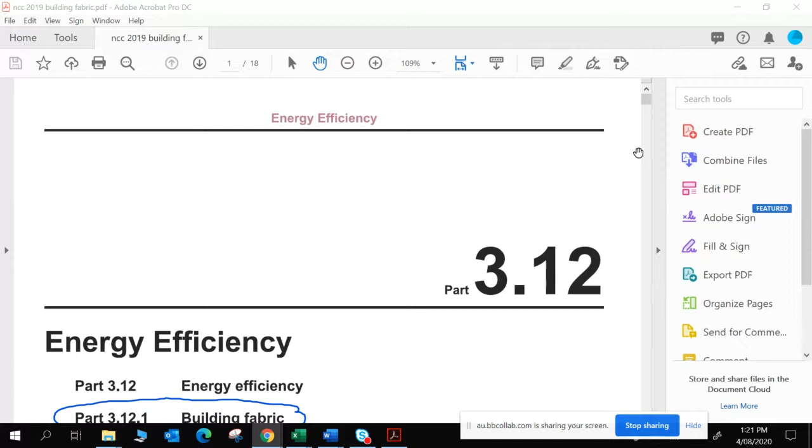So I'll be showing you the new 2019, despite the fact that there are no real substantive differences when it comes to your interpretation and your tasks, and certainly the application in regards to Class 1 and 10 buildings. I've put this updated 2019 PDF on the Learn page for you to refer directly to the section that's applicable. But by all means, and in fact it's even expected of you at this point, you've created an ABCB login, so the Australian Building Codes Board.

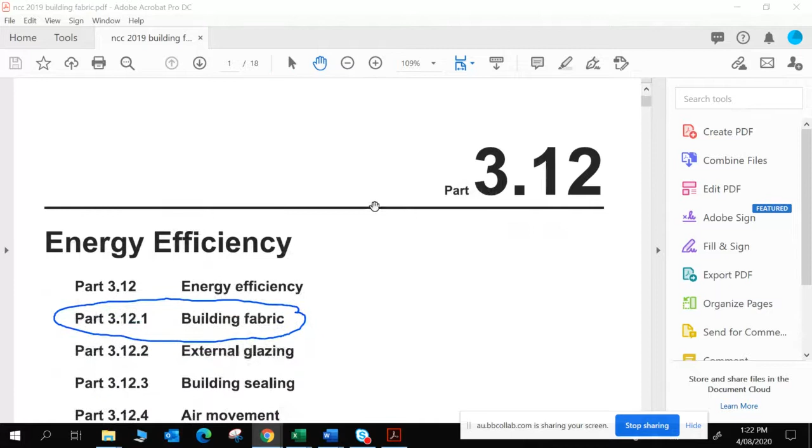Create your own login, and I encourage you to download a copy of the 2019, at least Volume 1 and Volume 2 NCC. Our Volume 3 is not particularly applicable to building designers. Some aspects in there from time to time are, but in the main, Volume 1 and Volume 2 are the really important ones for you to download, because you need to have regular access to them. Being a residential building, I'm referring to the Volume 2 section, and this one's here for you, supplied as a resource.

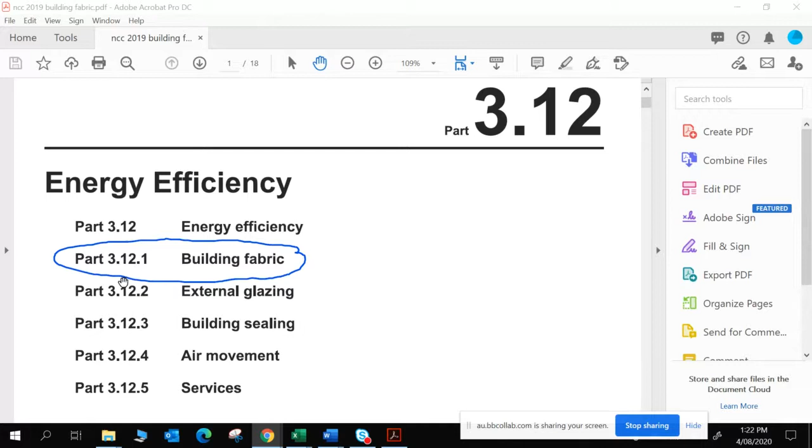We'll be looking at, for this second stage, the building fabric. When it comes to energy efficiency, we've got things such as our building fabric, which play a role in how energy efficient a building is, our external glazing, our building sealing, air movement, and services. Later on in the subject, we'll be looking at more of these other aspects, but currently we're having a look at building fabric. So we'll go to Part 3.12.1, but on the way, I've marked other little bits and pieces that we should consider.

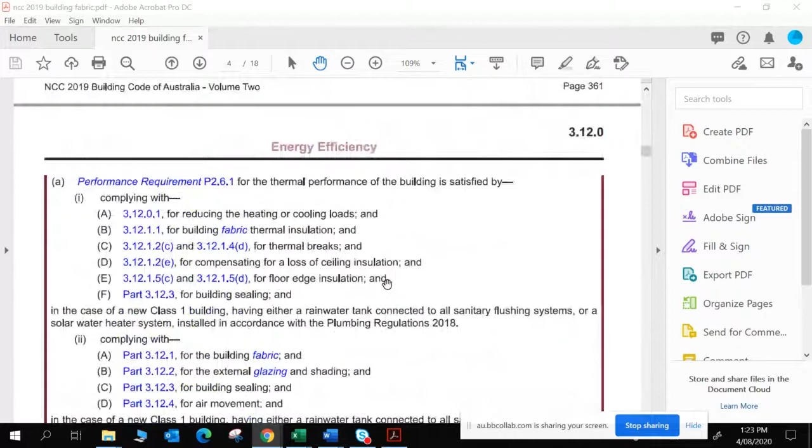Scrolling down through here, you'll see the section of markup. It's where we've got a bit of explanatory information saying if you want to comply with the NCC, you've got two options. Well, this is the deemed to satisfy approach. Now there's always the possibility to meet performance requirements. However, the justification of those performance requirements is a difficult, lengthy, and often expensive process, and something that goes beyond the bounds of what we can adequately cover. And each situation is unique as well.

So we don't focus on that in this subject, but we do look at deemed to satisfy, and in meeting the deemed to satisfy, we've got two options. Our option one is to get an energy rating.

So if we have sufficient knowledge and insight into how we can make a reasonably energy efficient building, we can typically apply that knowledge straight away in our design and be fairly confident that our energy rating will meet 6 stars, and then we go out and get an energy rating that meets the 6 stars, and we progress on.

So that's one option, is we can have an energy rating. They're fairly inexpensive and also provide a great deal of insight into other aspects that you might want to tweak a little bit as well. So certainly a good idea, but to help with some of the base understanding, some of that formulation of how we design an efficient building, it's really good for us to go through the approach of the elemental provisions.

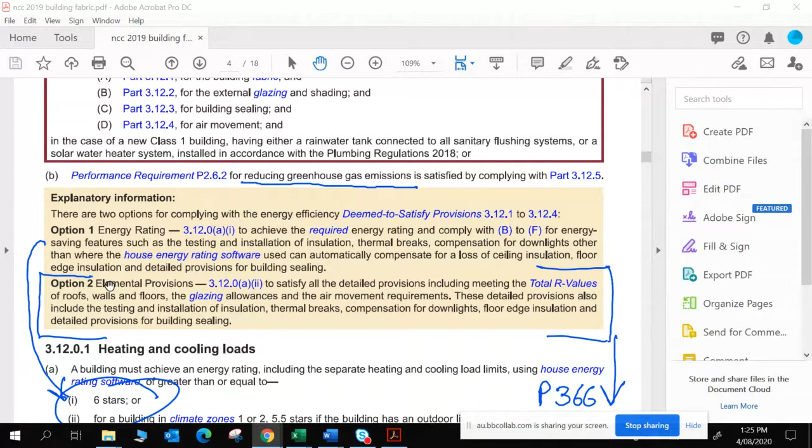So that's what we'll be doing primarily in this session, is having a look at the elemental provisions, because that tells us typically in this stage the level of insulation we'll need in certain scenarios for certain types of building fabric. So our elemental provisions are on page 366. So we'll make our way down to page 366.

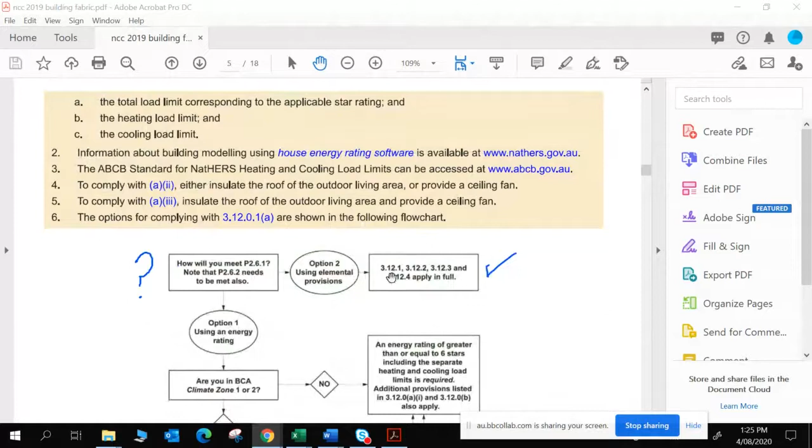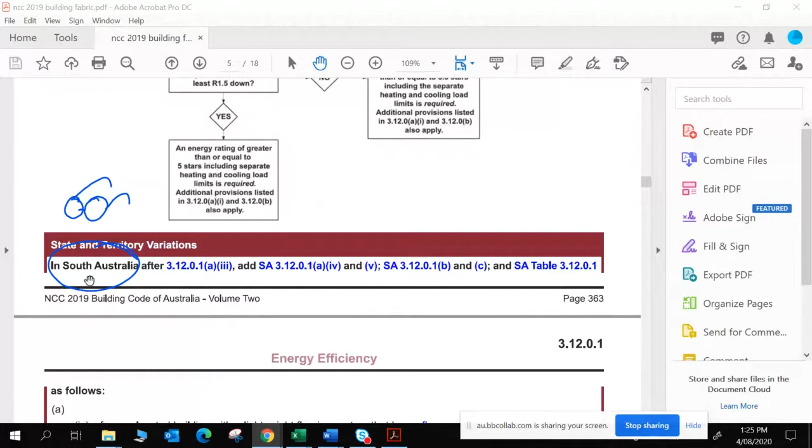On the way, here's a diagrammatic version of basically what I've just expressed up here. You can have a look at that diagrammatic version if that helps with that understanding. So on the way, something that's not applicable to the task or specific to what we're covering in this subject, but something you should always be aware of within the NCC, is that there are state and territory variations. And whenever you see a state and territory variation, it's good to stop and read and have a look. It may apply to you.

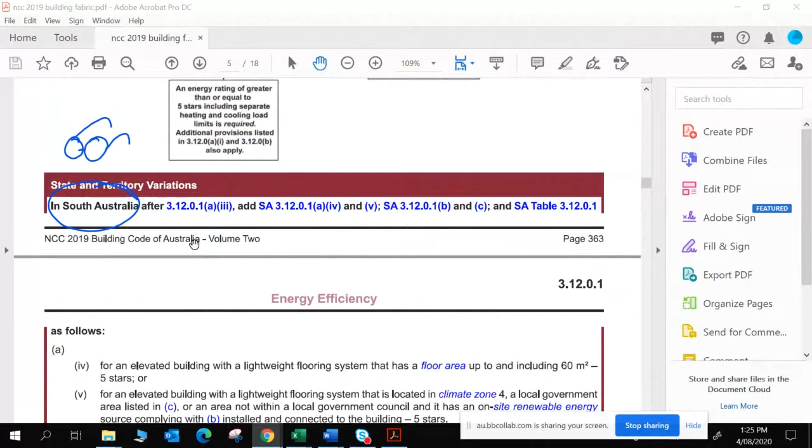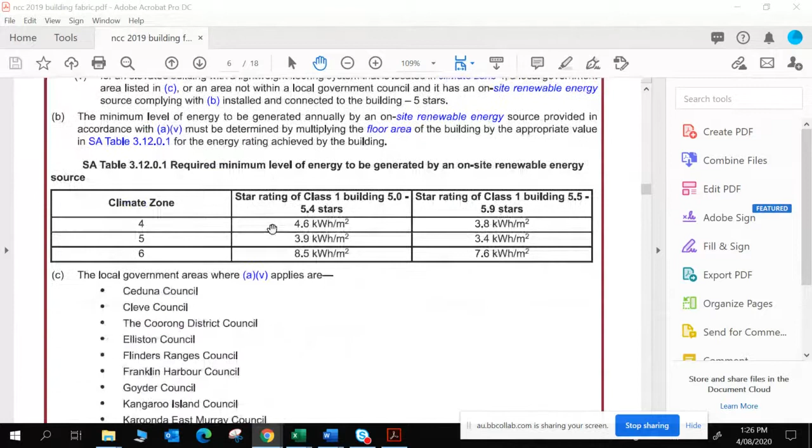Now, this particular state and territory variation for South Australia, so the area in which we're working, is about providing some concessions for lightweight buildings in certain areas within South Australia. So you'll see that under here, there are local government areas listed. So primarily our northern and remote council areas. So we've got Ceduna, Cleve, Coorong, etc. from this range.

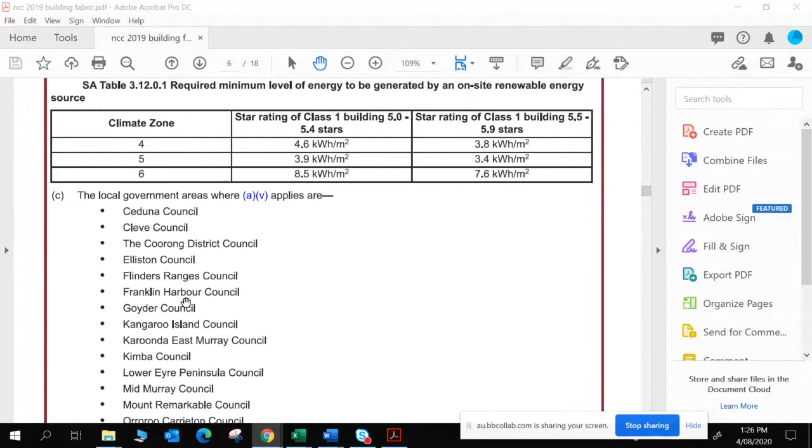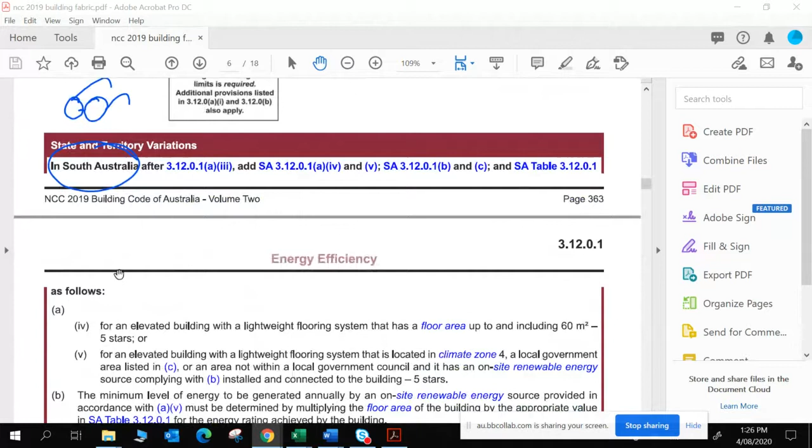So typically our council areas that are further out and not council areas that many of you will be working in, but some of you may, or from time to time, dabble in these areas. If you are and you're building a lightweight building, it may apply to you. You may be able to adopt this approach at a concession, which enables the energy rating to be reduced to 5 stars instead of our 6 stars as we saw before.

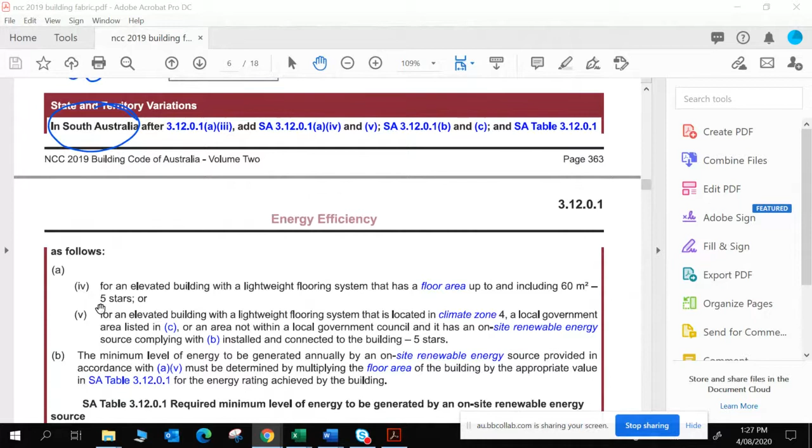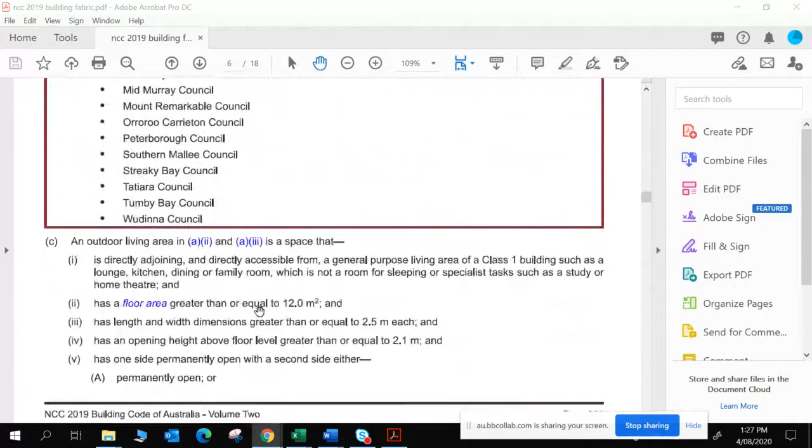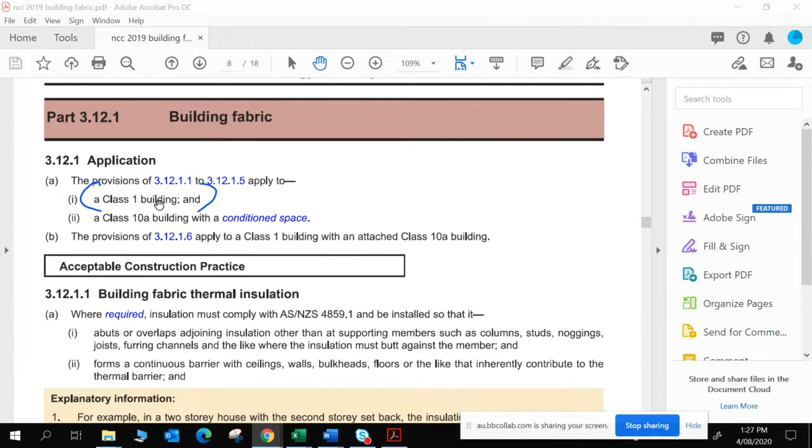But beyond that, look, have a read, have a little bit of an understanding of this, but most importantly, just be aware that it's there. So we'll keep passing on to what is directly applicable to what we're covering in this section here. So we're looking at building fabric, and we're looking at class 1 buildings, so our separate residential buildings, be that detached or semi-detached buildings. Then here we are at page 366.

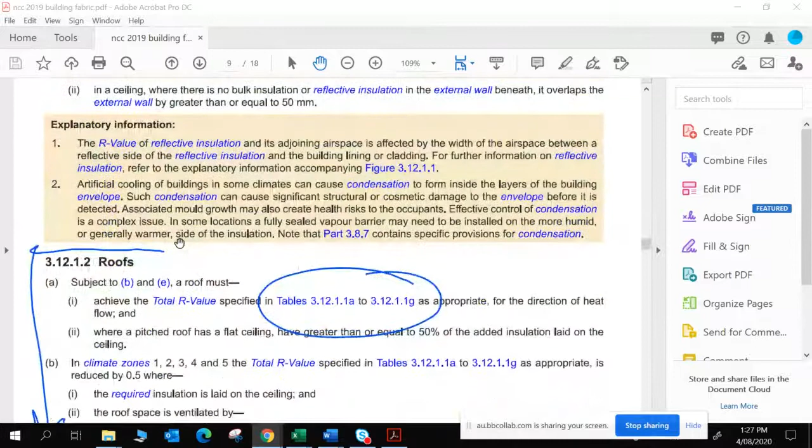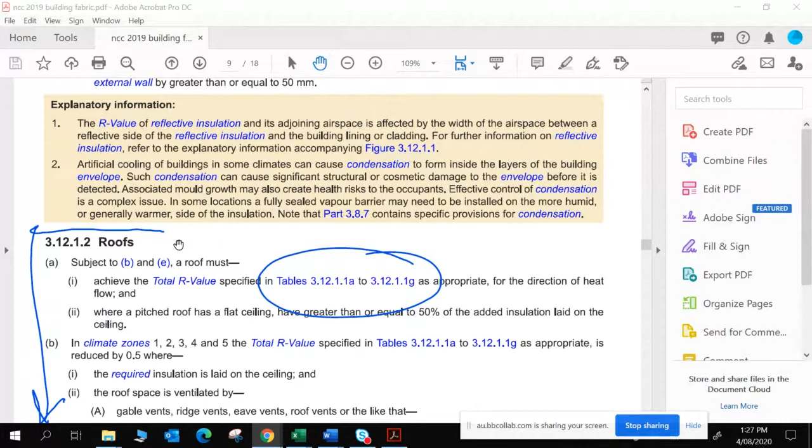This is where it all really starts with our building fabric, and it starts with roofs. So this section is broken down into our components being our roofs, walls, and floors, and then we move on to glazing. But our roofs, they have to meet a certain R value, so a resistance value for your insulation. And all of that, the ins and outs of that, are explained in the lecture carried out by Michael White, that I think is there on the Learn page.

And I suggest that it's good to cover that lecture first. So watch that lecture and that tutorial session to digest all that information before you have a look at this updated video I'm producing here, because this video is meant to be supplementary to that resource and take you through the new 2019 version.

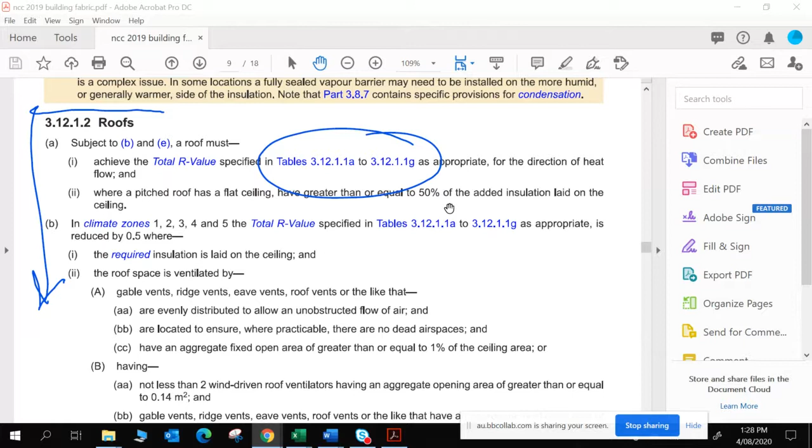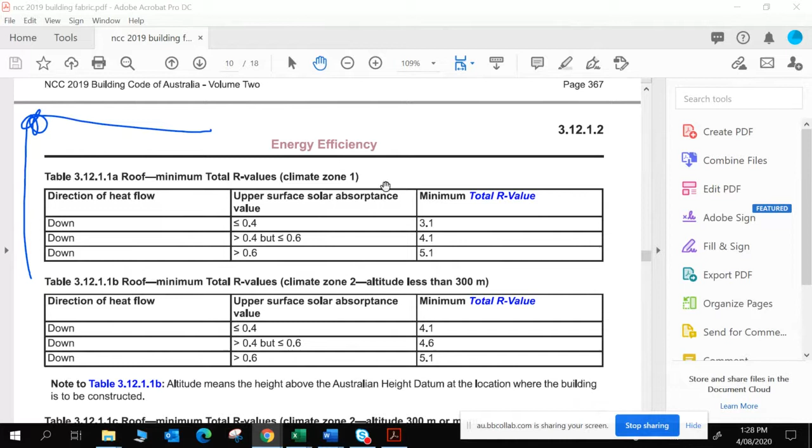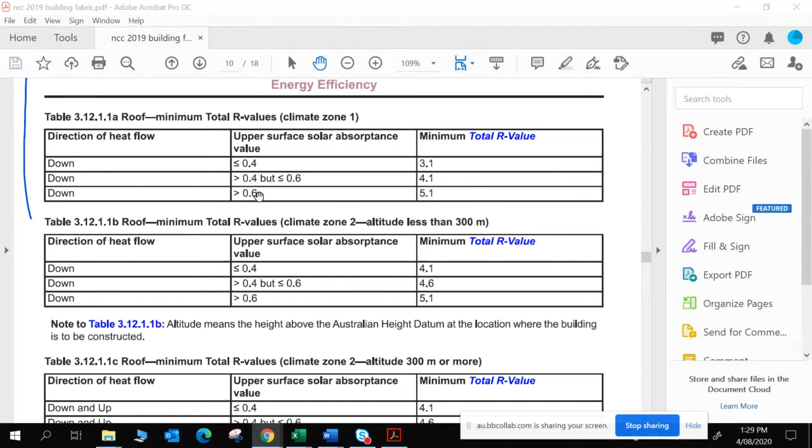So here we are at our roofs, and just like as is shown in that lecture there, we have minimum R values that are required for various different situations, be that our different climate zones or different roof solar absorptance. So that solar absorptance, as you should know, is based on the color of the roof, and different colors have a different degree of absorbance of that solar radiation, so have a different heating and or cooling effect on the building.

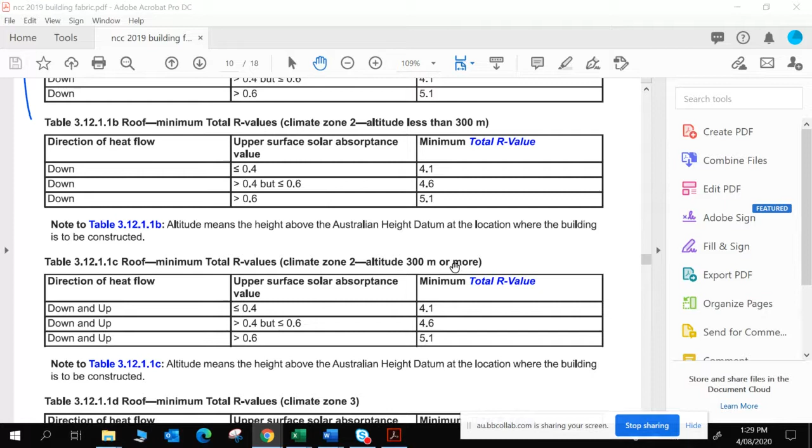So we have our different total R values required for different categories of solar absorptance under our different climate zones. And you see that climate zone 2 is broken into altitudes of less than 300 meters and altitudes of more than 300 meters, because as you increase your altitude, the average temperature drops away. That's why we have snow-capped mountains, etc. So as you make your way up the mountains, things get colder and colder. So we have different criteria for altitudes less than 300 and altitudes more than 300.

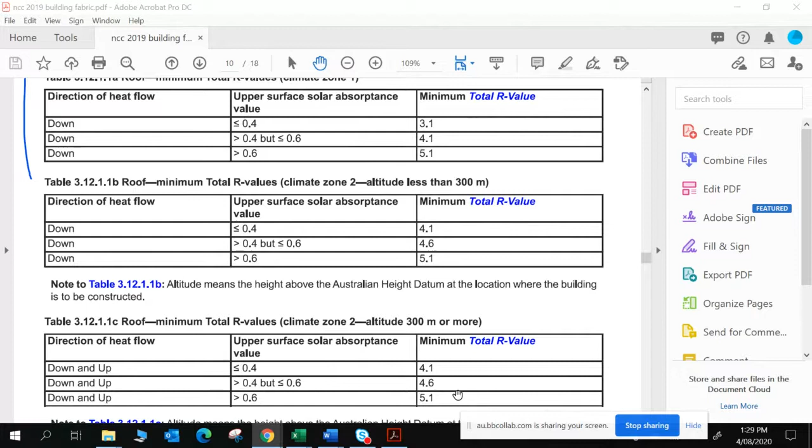But although substantively our minimum total R values are very similar, the major difference is that less than 300 is all about heat flow down, and then above 300 it's about down and up. And that leads into the next important thing that may help with task 2: in some situations we are concerned with heat flow down, and so insulate against heat flow down. But in other situations we are concerned with heat flow up.

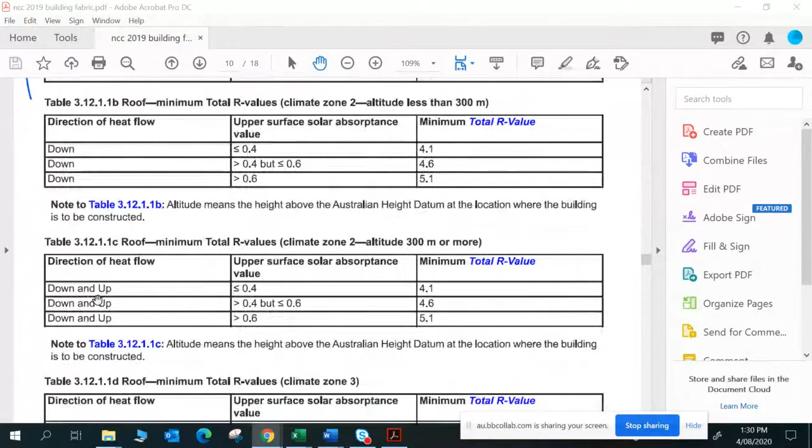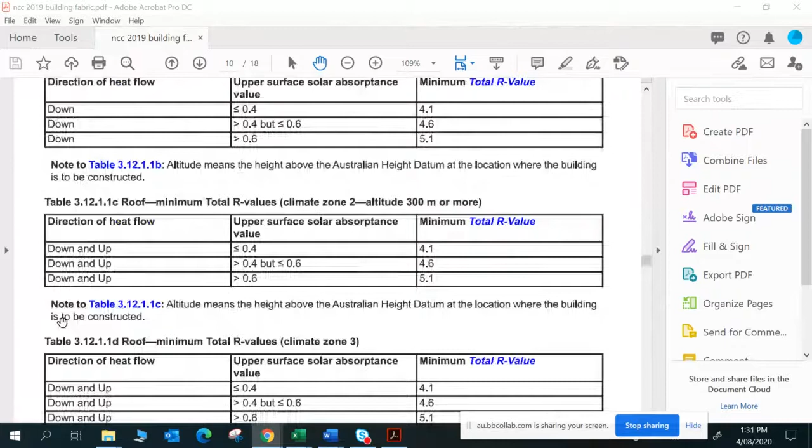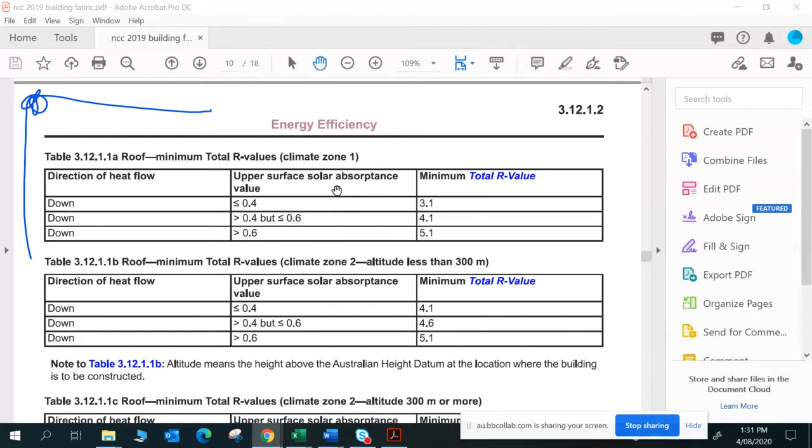So in our colder climates, climates 6 and 7, the ones with the higher numbers, we're worried about heat escaping the building. We want to keep those buildings warm, and that's where the focus of the NCC and the minimum R values required are on heat flow up. But in our hotter climates, climate zone 1, where the numbers are low, we're worried about heat flow downwards, the heating of the building from the roof space from the sun above. And in certain situations, we're worried about flow down and up.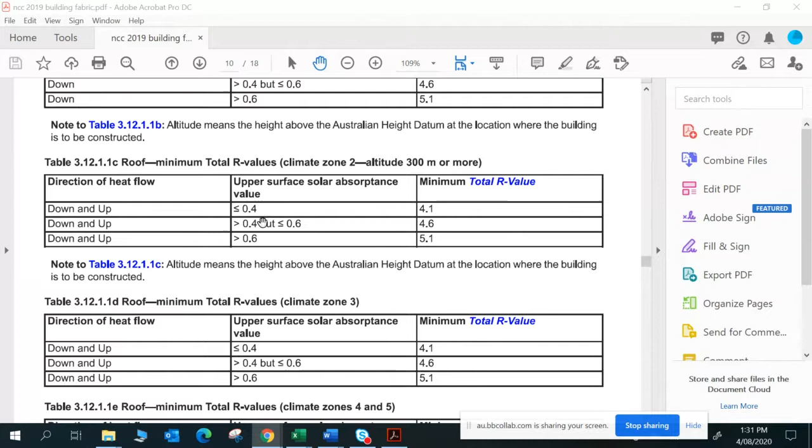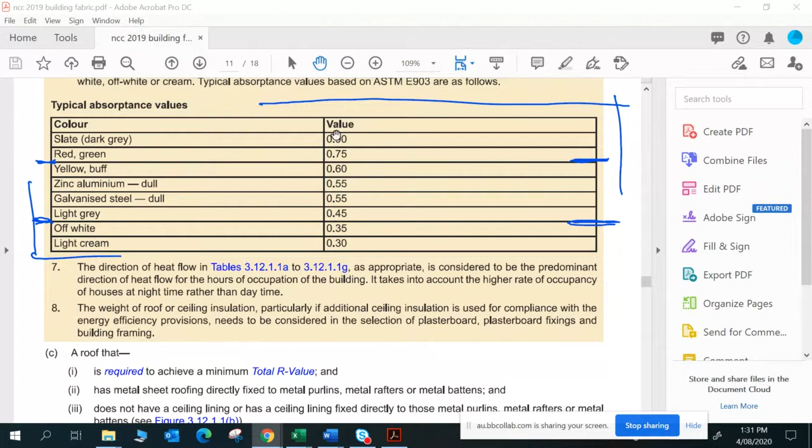So please be aware of that if you're not already, and that we have different R value requirements based on different solar absorptance. If you're going to apply this professionally, those solar absorptance guidelines are in this table here, showing different colors and the related solar absorptance. So that's our total R values that are required.

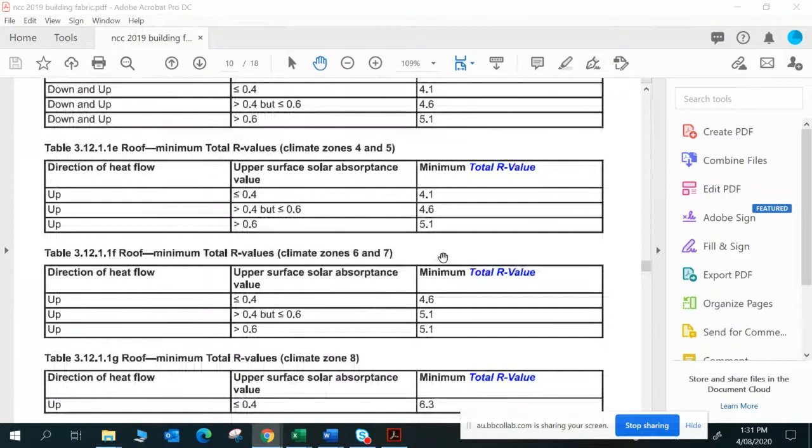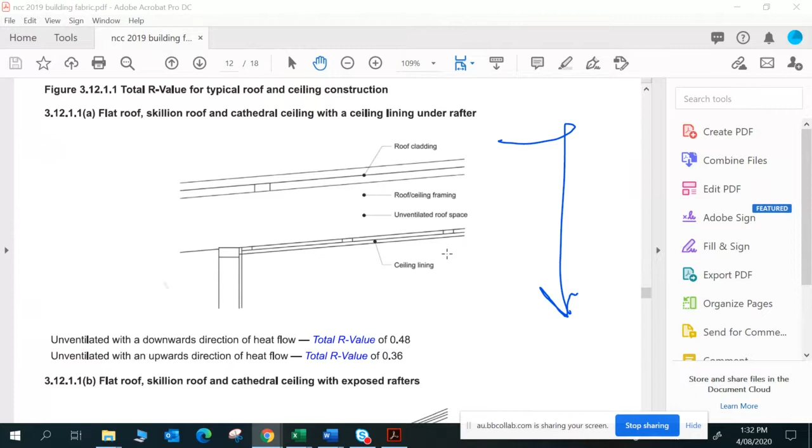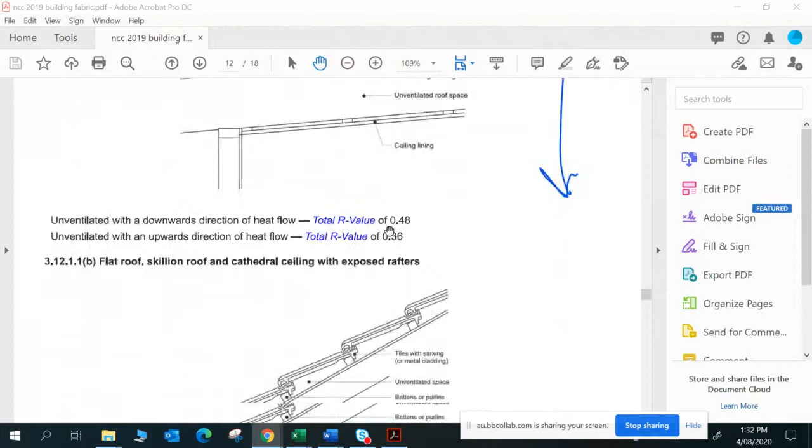However, that R value can be made up of a contribution by the building fabric and a contribution by the added insulation. So if we have an R value required of 4.1, it's not that we have to have 4.1 insulation. The roof style we have chosen may contribute part of that R value. That's what section 3.12.1.1 shows: various roof types and construction approaches have different contributory R values inherent in their construction.

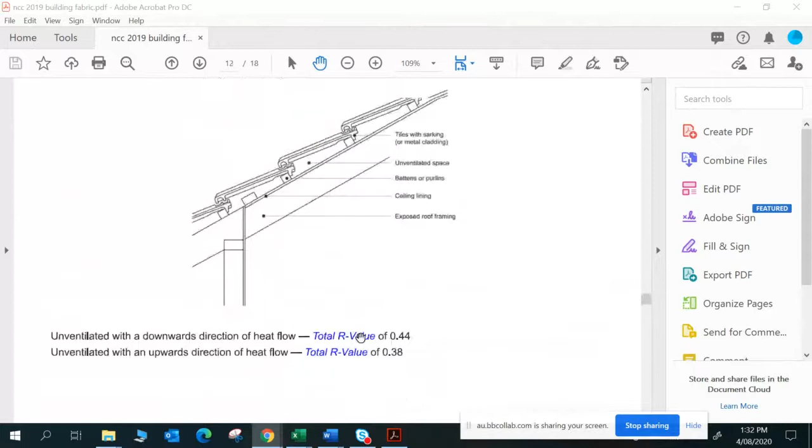Looking at this skillion roof here, we've got a contribution of R0.48 in a downwards direction of heat flow. So if we're looking at climate zone 1 or 2, our 0.48 contribution is important in working out what additional insulation we require. If we're looking at climate 6, 7, etc., then heat flow upwards is what's important. And if we're in one of those middle categories that requires heat flow up and down, we've got to consider both. So we can gain an appreciation from the NCC of the contributory R values for our roof construction types, and then determine how much extra insulation we need on top.

So, for example, if we had an R value required of 4.1 downwards, then because this skillion roof contributes 0.48 downwards, we would need additional insulation of R3.62. That R3.62 is R4.1 minus 0.48, if I've got my maths right off the top of my head. So we're looking at that additional insulation, and that's basically the sort of answers we're expecting in the task.

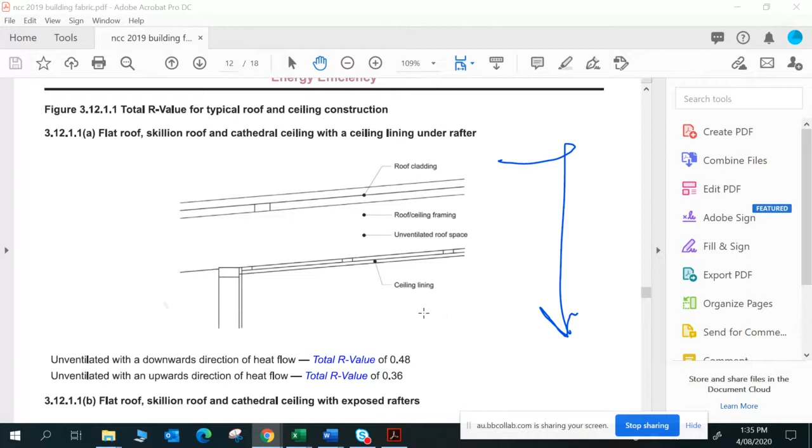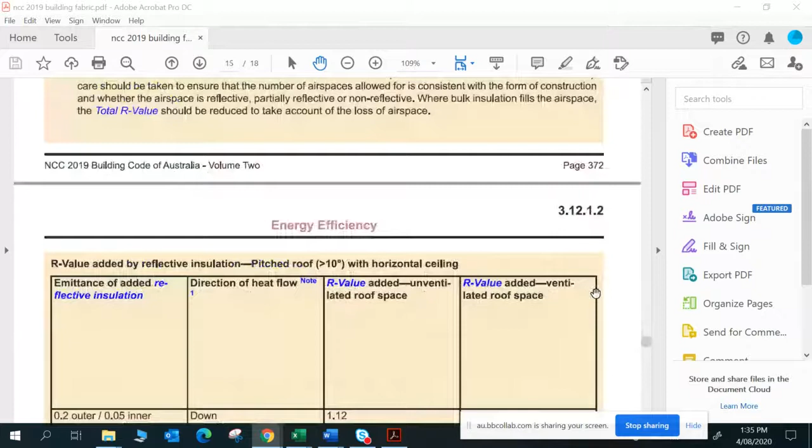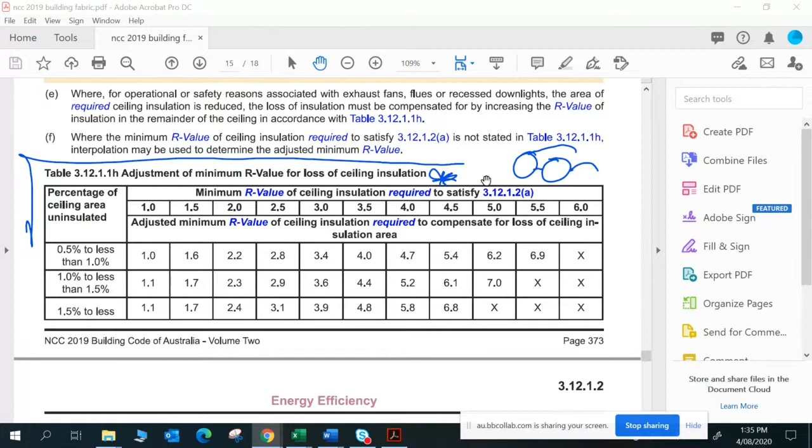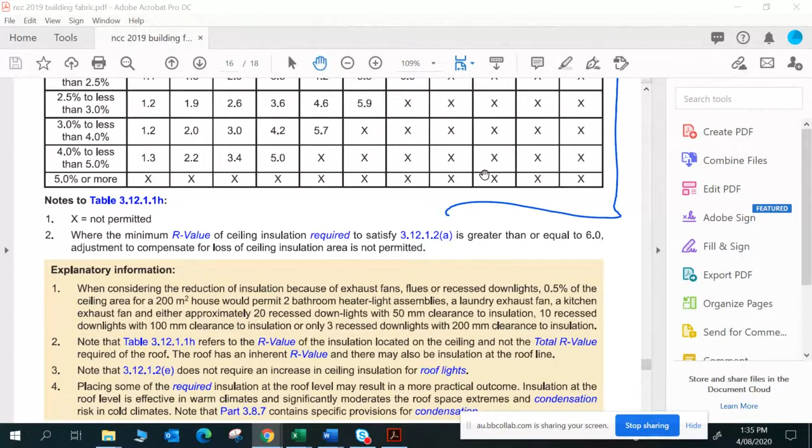We'll just go through the rest of the 2019 NCC for some other bits that may be applicable. We've got adjustment of minimum R value for loss of ceiling insulation. This was covered in the tutorial session with Mark and David. It's important when looking at the inclusion of downlights and other inclusions that reduce the amount of insulation in a roof. Very important to know in practice, but not directly applicable to our task.

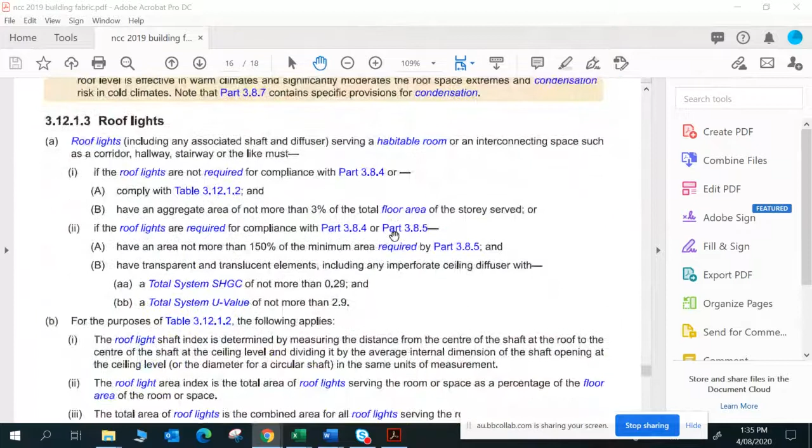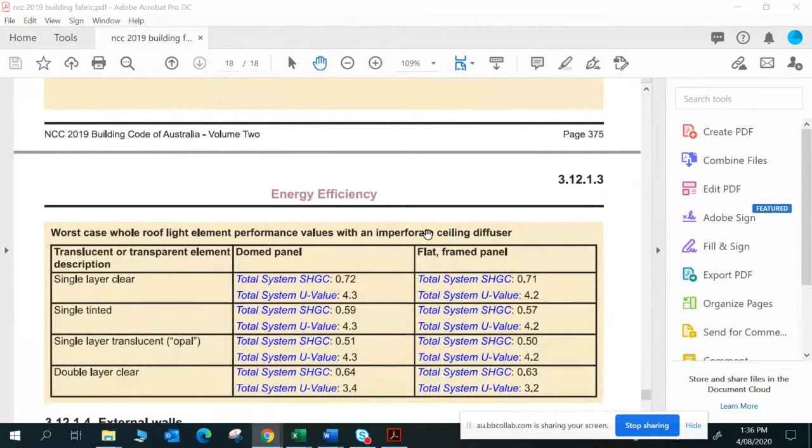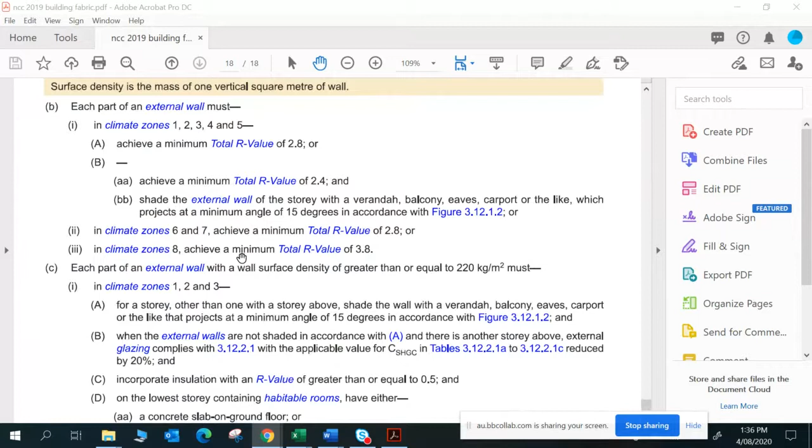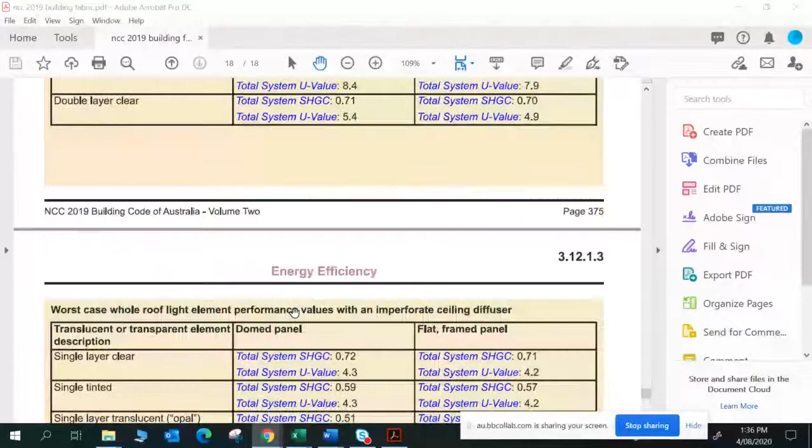There's also information in 2019 regarding roof lights, which was covered significantly in that lecture. This is the updated information. It's very similar to the 2016 version, except it looks a bit different with some explanatory sections. For roof lights, table 3.12.3, if I'm correct, has been removed, and it's in text form as opposed to table form. Very little substantive difference, just a different appearance to what you saw in the lecture and slides.

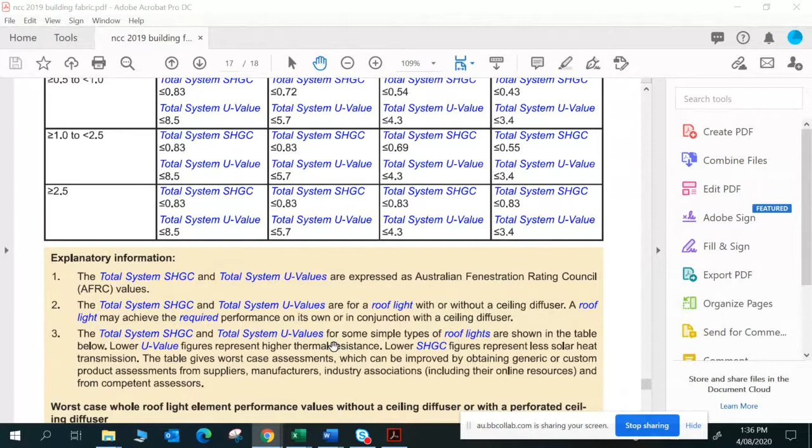So hopefully that gives you a good insight into some of the changes with the NCC and what sort of things you'll specifically have to look for in the task.